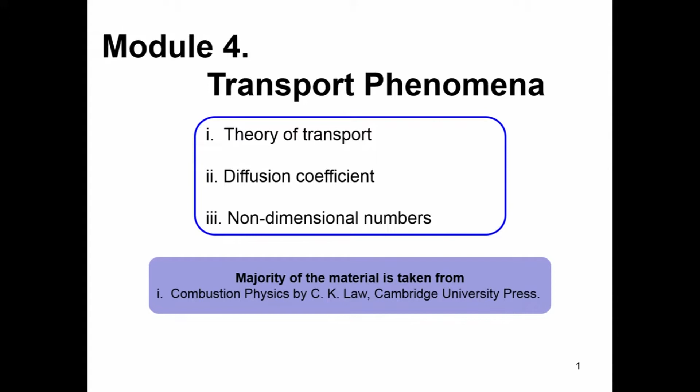So, we will understand the theory of transport, and then we will look into the coefficients which control this transport, which are functions of the composition of the gas, or the nature of the molecules present in the gas, and then we will find some useful non-dimensional numbers that will utilize these diffusion coefficients or transport coefficients, and these non-dimensional parameters will be useful in understanding the different kinds of governing equations and the flow systems that we encounter inside a practical combustor.

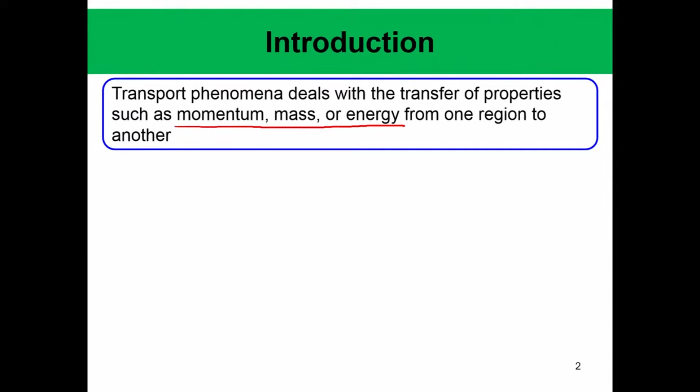So, if you go to the introduction, what does this transport phenomena deal with? This deals with the transfer of properties such as momentum, mass or energy from one region to the other. Okay. So, as I said, this transfer occurs when there is strong non-uniformity in this momentum, mass or energy. Okay. Now, there can be essentially two kinds of transport: diffusion transport, which is the topic of this class.

This diffusion is transport due to spatial gradients in its property. So, mathematically, how do we say that some property or some parameter is non-uniform over a field? It is quantified by these spatial gradients, right. So, if the gradients are 0, we can say that this quantity is uniform or homogeneous, whereas if it is non-homogeneous, this will be characterized by the spatial gradients of that property. And these processes basically attempt to restore spatial uniformity of that property.

Okay. Now, in contrast to diffusion, convection is essentially bulk movement of the fluid medium. Okay. So, diffusion is not bulk movement. Diffusion is essentially one species moving from a region of high concentration to a region of low concentration, but when there is a low concentration of species A, there can be a high concentration of species B. So, essentially species A is moving in this direction and species B is moving in this direction, where in this region there is a high concentration of species A and this is high concentration of species B. So, there is no bulk transport as such, that is what we want to say.

Okay. It is only that this particular species move in different directions, whereas convection is characterized by bulk movement of the fluid medium and relevant properties carried along with it. Okay. So, that is the difference between diffusion and convection. One is movement of certain kind of species, whereas convection is the bulk movement of the entire fluid medium. Now, convection can facilitate or retard diffusion depending on the direction in which diffusion is happening.

With respect to the direction of the flow, convection can facilitate or retard diffusion, and convective transport depends upon fluid motion. Okay. Whereas diffusion really does not depend upon fluid motion. So, that is how essentially you will see that the entire fluid and kinetics will be connected. Convection basically contains the information of the fluid motion, and then diffusion essentially connects with that property over small length scales, and then this will connect with the reaction. So, we will see that when we go into the governing equations in the next few classes, whereas diffusion transport may vary for mass, momentum or energy.

All right. So, phenomenologically, by diffusion we do not only mean diffusion of species, we mean diffusion transport of heat, which happens when there is a temperature gradient, diffusion transport of momentum when there is a velocity gradient, and diffusion transport of species when there is a concentration gradient. Now, just to give you an example, I am sure you are all aware of this. Let us consider these two parallel plates which are at two different temperatures, Ta and Tb, and Ta is greater than Tb, and the gap between these two plates is filled up with a fluid medium, or a solid medium is also possible.

Suppose we consider a fluid medium, then we know that there will be transfer of heat from this high temperature region to the low temperature region, and this we call diffusion of heat. Now, similarly, if there is a concentration difference.

And if they are concentrated in a thin region in space, it automatically means that the gradients of these properties, either the temperature or the species, are very high, and when there is a sharp change in concentration or a sharp change in temperature, then this diffusion becomes very important.

We will see that the diffusion transports appear as second order derivatives in the species equation or in the energy equation, and they become the controlling process instead of convection inside a flame. Outside the flame convection can be important, but inside the flame typically diffusion processes of heat and species become very important.

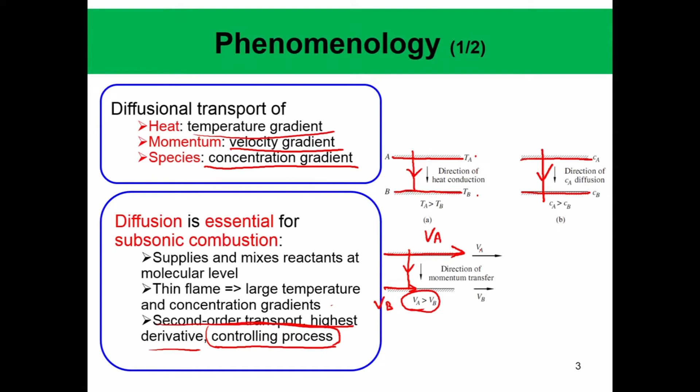All right. So, that is why we need to understand diffusion, and here we will see the phenomenology of diffusion, and we will derive how we can characterize the flux of a property, how the property is transported across a plane, using just basic principles.

How the rate of change, or the flux of the property across a plane, can be derived from very basic first order principles, and that we will use to basically find out the diffusivity.

So, as we said before, convection is a first order transport, and all properties are transported at the same rate, that is with the flow velocity. So, there is no problem. Even if you have different species at different concentrations, convection will transport them with the same fluid velocity, which is u.

But we will also see that in certain cases, especially in things like multi-phase flow or two-phase flow, when we study droplet combustion, the bulk flow velocity can be induced by diffusion.

So, diffusion can generate convection in certain cases, and as an example we will see the depletion of water from a cup through diffusion of water vapor from the surface. As we know, there is a continuous evaporation of water vapor from the surface. Now, for continuous evaporation to take place, there must be a continuous bulk supply of water from the entire fluid, and that basically is the Stefan flow, which we will do.

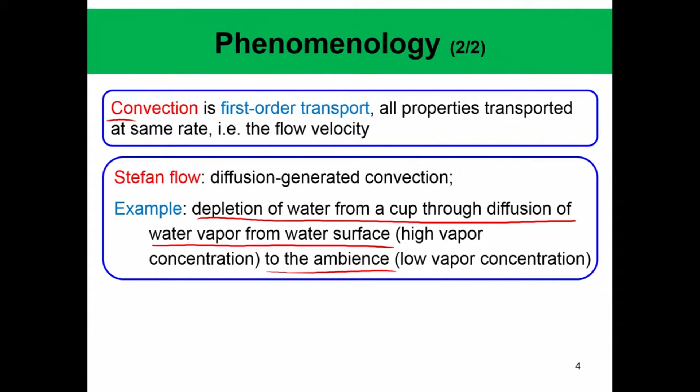So, this depletion of water from a cup through diffusion of water vapor from the surface to the ambience will be from high vapor concentration to low vapor concentration. We will see that that will induce a flow, and that will be essentially the Stefan flow. Okay. So, there can be diffusion-generated convection.

Then we will look into diffusion coefficients from an elementary point of view, and for an elementary derivation we will use the collision theory of reaction rates, with the following assumptions made for simplification. So, what we will do now is derive the formula for diffusivity, that is, the parameter that controls the rate of diffusion. This will be inspired from the collision theory of reaction rates.

So, we will assume that the gas in which the diffusion is taking place is sufficiently dilute, and only binary collisions are important. Now, if you remember, we have also used the collision theory in deriving the reaction rate constant K. So, we can ask: diffusivity also is derived using collision theory.

Yes, both actually happen due to collision between molecules, but when you have reaction you basically have a change in the electronic structure of the molecule. In diffusion there is no such change. We accommodate this in the theory by saying that only when the collision energy is beyond a certain energy, the activation energy, collisions trigger reactions. But in this case we will just find the flux of species concentration happening because of these collisions, so no concept of activation energy comes in.

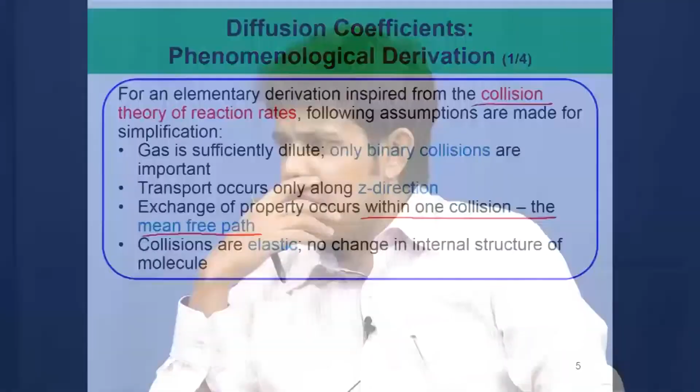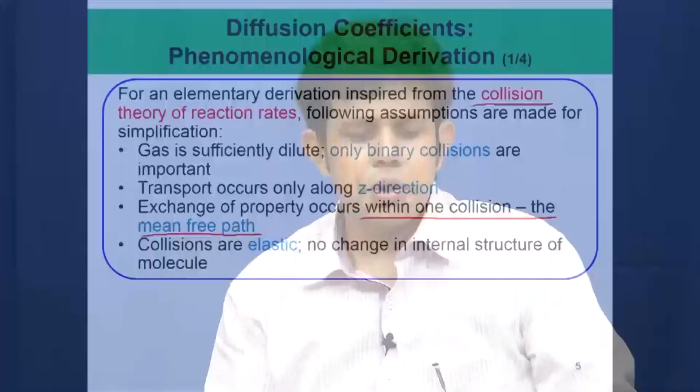So, diffusion is essentially an exchange of property. If you have two regions of high concentration and low concentration, molecules of high concentration travel, and after a certain time there will be uniform concentration; that is the basic essence of diffusion. To equilibrate this property we need collision of molecules, and we will assume this exchange occurs within one collision, that is within one mean free path, and that collisions are elastic with no change in the internal structure of the molecule.

Also, remember that mean Vij is the average molecular velocity obtained from the Maxwell velocity distribution function, and sigma ij is the diameter of the collision volume, the maximum diameter within which these two molecules must be located for collision to happen, and K0 is the Boltzmann constant. Okay. So now let us consider this schematic, where we have essentially three parallel planes.

So this is the z coordinate, this is the x coordinate, and this is the y coordinate. Say this is our origin, and through the origin this plane O passes. Now at L distance from the origin we have another plane A, and at L distance below the origin, below plane O, we have another plane B.

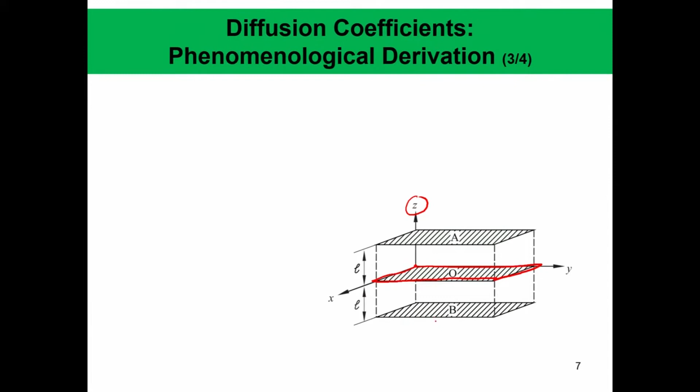So now we can write, by using Taylor series expansion, that this property psi at L is equal to psi 0 plus L times d xi dz at plane 0. This can be easily obtained by Taylor series expansion up to first order, and we can also write psi at minus L is equal to psi 0 minus L times d xi dz at 0.

So we can write this at plane L, and this is xi at plane minus L, whereas this xi can be any property as such. Here we do not specify the property and we just consider a generalized property.

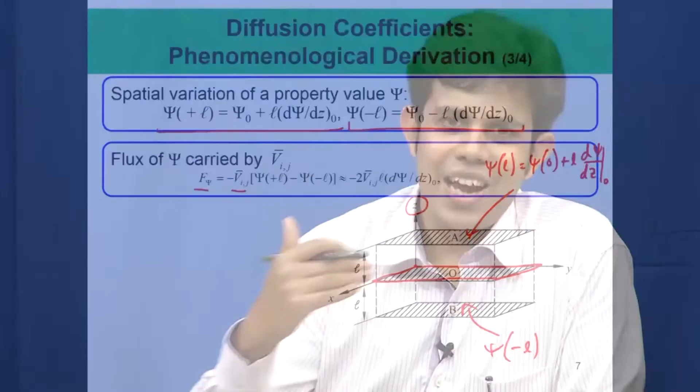And then the flux of this psi carried by the mean velocity, that is the average molecular velocity, is given by f xi, which is the flux of xi carried by mean Vij, given by minus mean Vij. The minus sign comes because this flux is travelling from a region of large xi to a region of small xi. So that is where the minus sign comes in.

So F psi is equal to minus Vij times xi plus L minus xi minus L. So the flux of xi is nothing but the difference of this property between these two planes, carried over by a mean molecular velocity mean Vij.

Then we can substitute this from this and this from this, and we can write this as minus 2 Vij times L, where L is the distance between these planes, times d xi dz at plane 0.

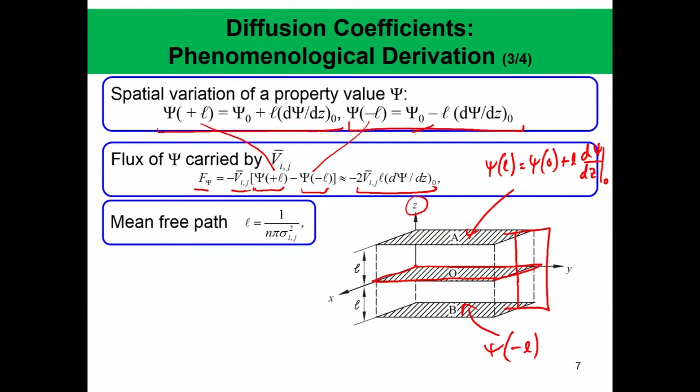Now what is L? If you remember, we assume that the exchange happens within one collision itself. Then what is the distance over which one collision happens? That distance is of course the mean free path, the average distance, and that is given by one over the number density times pi times sigma ij square. So sigma ij once again is the diameter of the collision volume.

And then of course we know that mean Vij is given by 8 k0 T divided by pi mij to the power of half, which comes from the Maxwell Boltzmann velocity distribution. We used this formula in the previous kinetics class also when we derived the formula for k.

So we can substitute L and Vij into this equation, and then we get this form. That is, f xi is nothing but minus 2 times 8 k0 T divided by pi mij to the power of half times 1 by n pi sigma ij square times d xi dz. And this derivative d xi dz, as you see, comes essentially from the Taylor series expansion, from here and here.

So now, instead of this generalized formula that we have derived, we can use this for different kinds of transport. We can use this for species transport, for momentum transport, and for energy or thermal transport.

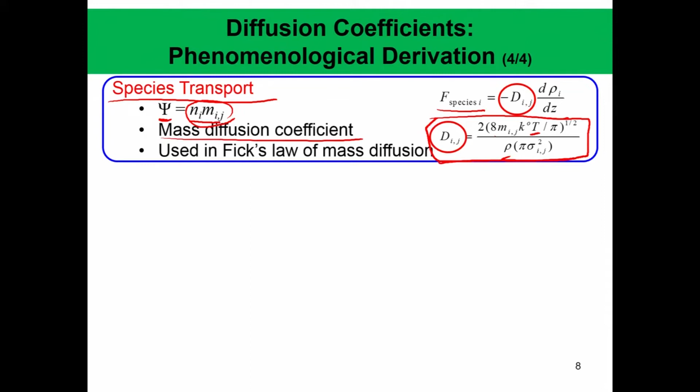The reason is simple: as you increase the temperature, your mean molecular speed Vij, which is (8 k0 T / pi Mij) to the power of half, is increasing. So, clearly there is very fast transport happening when there is more Dij. That is where this T to the power of half comes in.

Now, momentum transport. We write this generalized property psi as n times Mij, for the mass, times Vy, and when you take d xi dz, it essentially becomes dVy dz, and then we find the viscosity coefficient. The flux of momentum transport is given by minus mu ij times dVy dz, which comes from the previous formula of F xi equal to something times d xi dz.

So, as you put in different forms of xi, whether species transport or momentum transport, this parameter changes, and the associated change becomes the change in the coefficient. So, the viscosity mu ij is given by 2 times (8 Mij k0 T / pi) to the power of half divided by pi sigma ij squared. Importantly, rho is missing here, so it does not depend on rho.

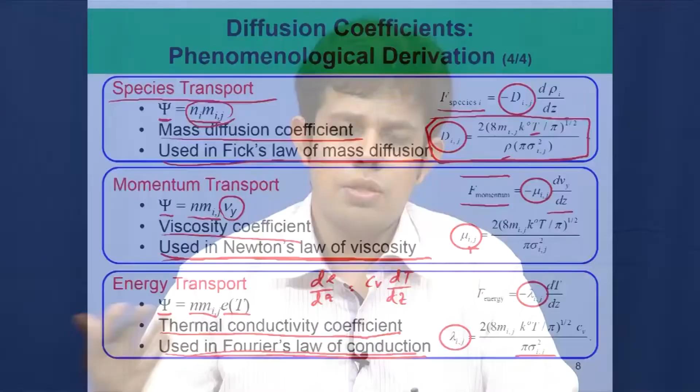The most interesting thing is that because these have similar origin, all of them have similar dependence: all are temperature T to the power of half dependent. So, we can derive it in a simplified manner, but it is very illuminating, since it tells us why it should depend on temperature: it depends on the mean molecular velocity, which comes from the Maxwell-Boltzmann distribution, and that is T to the power of half.

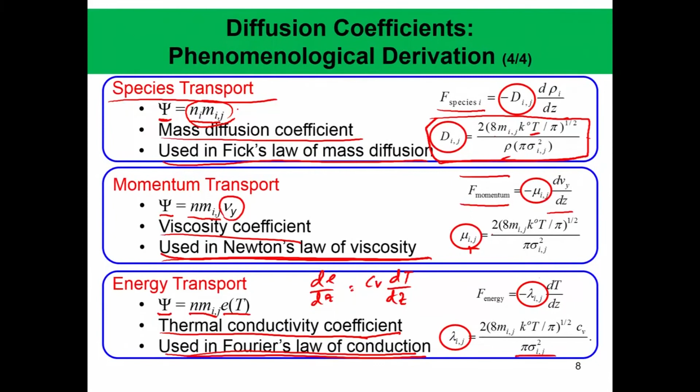Now, what we find is lambda, mu and rho Dij, that is, if we take this rho here. We will see later that instead of Dij, rho Dij is sometimes a better choice for defining diffusion.

So, we see that both these things, lambda, mu and rho Dij, are density and hence pressure independent. Now, why is this density independent? Suppose you increase the density twice, that you put in twice the number of molecules of species i. So, you would think that now my transfer will increase. Yes, that increases, but the distance between which they collide, L, the mean free path, also decreases now by half.

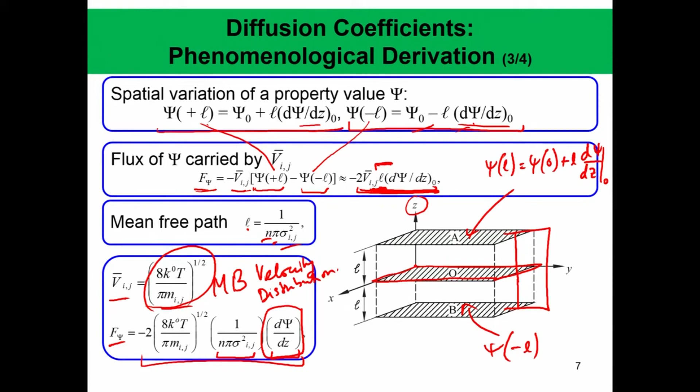As you know, the mean free path appears here. The flux is directly proportional to the mean free path. So, as the mean free path decreases, the increase of that particular species is counteracted, and hence there is no change. These parameters lambda, mu and rho Dij do not depend as such on density and pressure.

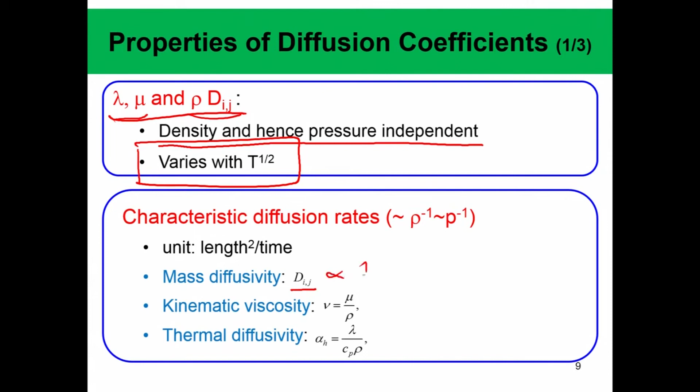But the most interesting thing is that they vary with T to the power of half. Actual variation is even stronger, but T to the power of half gives us quite a good qualitative idea that it should be increasing with temperature all the time. Now, the characteristic diffusion rates. The diffusion rate of choice is sometimes Dij. Dij is proportional to 1 by rho, so it can be written to be proportional to 1 by P.

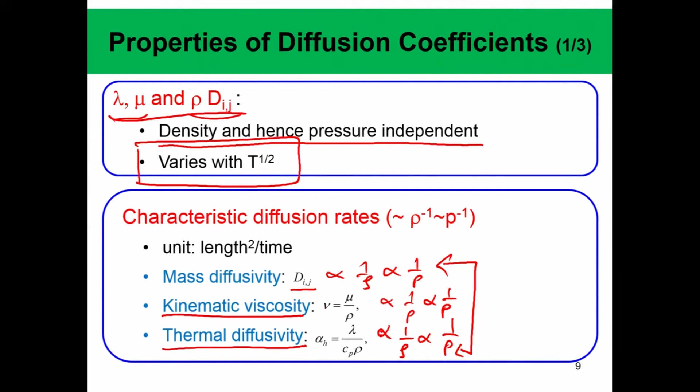If we use kinematic viscosity, that is essentially proportional to 1 by rho, so that also becomes proportional to 1 by P. And thermal diffusivity, which is lambda, thermal conductivity, divided by rho Cp, is also proportional to 1 by rho and hence to 1 by P. So, if you consider these characteristic diffusion rates, mass diffusivity instead of rho Dij, kinematic viscosity instead of dynamic viscosity, and thermal diffusivity instead of thermal conductivity, because they are all proportional to rho to the power of -1, they become pressure dependent.

Now, we always look for non-dimensional numbers. There are non-dimensional numbers of importance in combustion; we will also encounter others later in terms of chemical kinetics. We already encountered one, the Arrhenius number for kinetics, but here we are talking about non-dimensional numbers in terms of transport. The numbers of importance are the Schmidt number, Sc ij, the ratio of the kinematic viscosity to the binary diffusivity, nu by Dij, which we can also write as dynamic viscosity divided by rho times Dij.

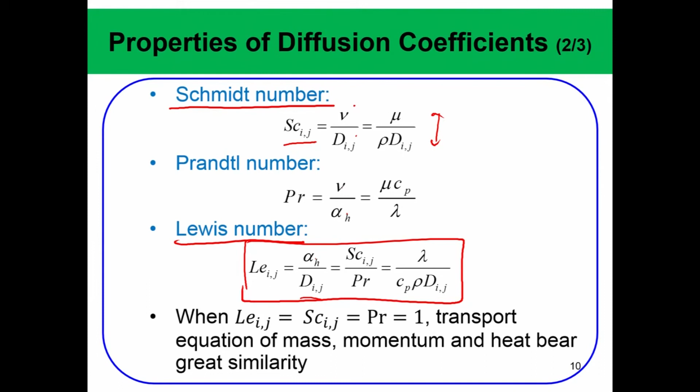Prandtl number is important, though it does not change too much: nu divided by alpha. Very important in combustion is the Lewis number, the ratio of the thermal diffusivity alpha to the binary or species diffusivity Dij. In combustion there is always competition between heat transport and molecular transport, and this quantifies which one is stronger. If the Lewis number is greater than 1, thermal diffusivity wins over species diffusivity. If Lewis number is less than 1, species diffusivity wins over thermal diffusivity, and so forth. So, that is a very important number.

Now, from kinetic theory, there is also second order diffusion, which is actually observed in reality. What is second order diffusion? When there is a temperature gradient and you are considering multi-component species, not only is heat transferred, but there is also mass diffusion. A good example is that light species like hydrogen go up the gradient and heavy species like soot go down the gradient. We will come back to this later when we discuss the constitutive relations that define the different diffusive processes inside the governing equations.

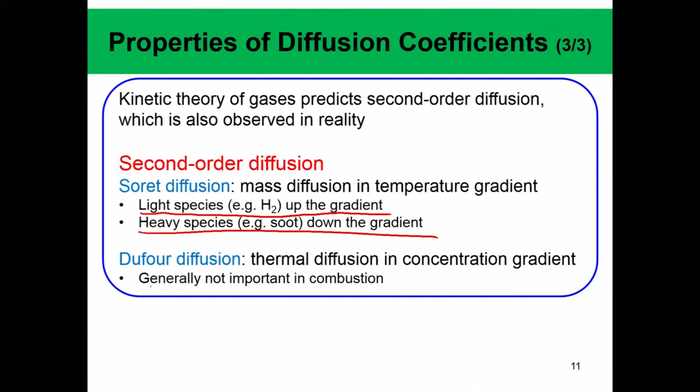And Dufour diffusion is the thermal diffusion in concentration gradient, and it is generally not too important in combustion. All right. So, as we said, for all these properties, of course the T to the power of half dependence is nice, but this diffusivity is not really proportional to Mij. Larger the mass of the molecule, your diffusivity should not be large, and there are actually two simplified assumptions.

As we have seen in kinetics also, we need transition state theory to properly explain different things. Similarly, here also the refined theory can be used using kinetic theory of gases. Okay. So, here I will not go into the details of this, but we will just give you a brief overview of what the parameters are and how the calculated properties look.

So, here the interesting thing is, what is the difference? The difference is that when we were talking about collision theory, we meant that this molecule goes and hits these molecules, right. We were actually counting the number of collisions that were happening. But actually these molecules are not billiard balls, right.

They have a force field surrounding them, they have an electron cloud, and those electron clouds have force associated with them. So, we do not consider molecular structure in these ones, but the collision dynamics in this case, instead of this hard collision, is described by a central force field which is represented by a force potential.

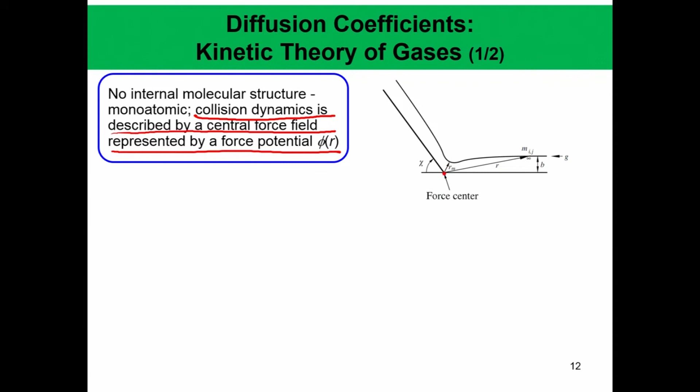Okay. So, here instead of these hard collisions, we consider a central force field, with a force potential which describes the force field. So, we actually consider this molecule to be a point mass. We do not even need to consider the molecular structure, and then the force potential will describe how much collision can happen.

And as you can understand, if we consider a hard sphere, it means that inside the sphere this potential goes to infinity, but outside the sphere there is no effect as such. So, only after the collision is there the molecule response. Before that this molecule does not sense that another molecule is coming, but in reality that does not happen.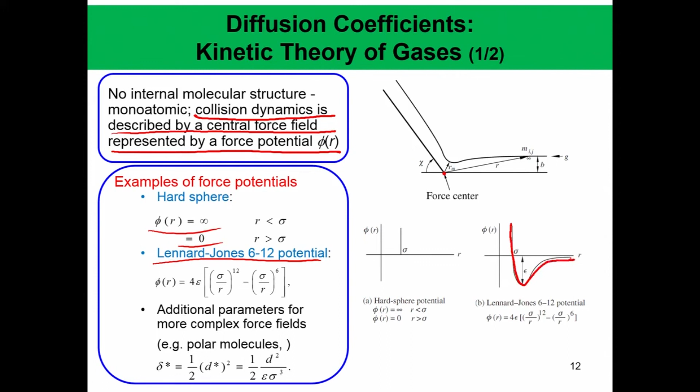Of course, the molecules have an electron cloud, as I said, and as a result we consider this Lennard-Jones potential, which is given by this kind of a potential curve, and then we do some calculations, and these are the final results that we obtain. So, do not get worried about these, they are nothing but collision integrals, and this is some non-dimensional temperature as you see here, and these collision integrals can be found tabulated as a function of this T star and D star, which is another length.

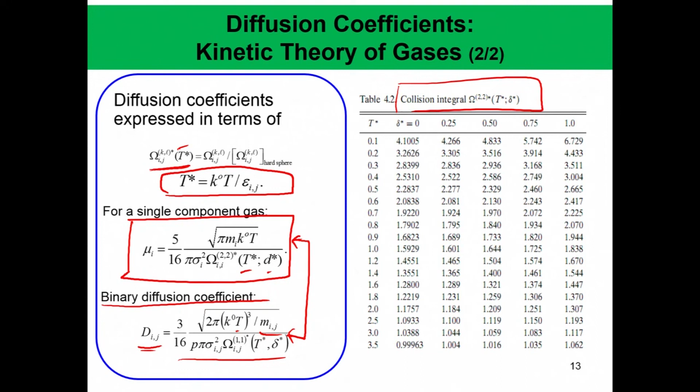So, with that we will end this transport theory topic, and next we will go on to discuss the governing equations, where we will see how these transports as well as the kinetics come in along with the convection.

So, basically we will see that with the governing equations we can describe essentially any flow field of choice, and that is the purpose of the governing equations, which is a very central theme of any combustion course, and of course a very central theme of our course also. So, we will come back to that in a short amount of time.